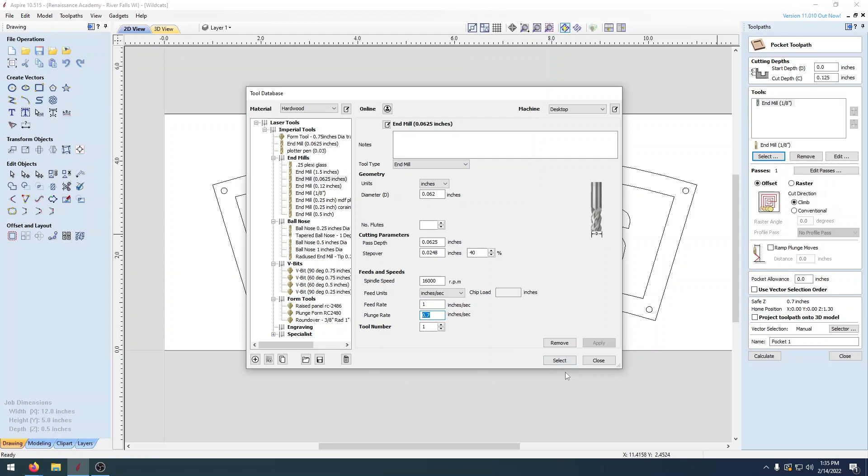So again, our pass depth we want to have is the same diameter as our mill bit. So our pass depth is 0.0625. Our step over is going to be 40%. So again, for 1/16 of an inch, it's going to be 0.0248. Our spindle speed is going to be 16,000 RPM. And our feed unit is going to be in inches per second. And our feed rate will be 1 inch per second and a plunge rate of 0.7 inches per second. And we will hit select.

Now what we want to do is select both of our vectors. So I'm going to select this outside one first, hold down shift on the keyboard, and select my text after that. Then I am going to select ramp our plunge moves, and we'll just do a distance of, let's say, 1 inch for our plunge move. What that's going to do is allow us to move horizontally as our bit goes down so that our bit has an easier cut. So then we'll hit calculate, and you will see a bunch of lines appear.

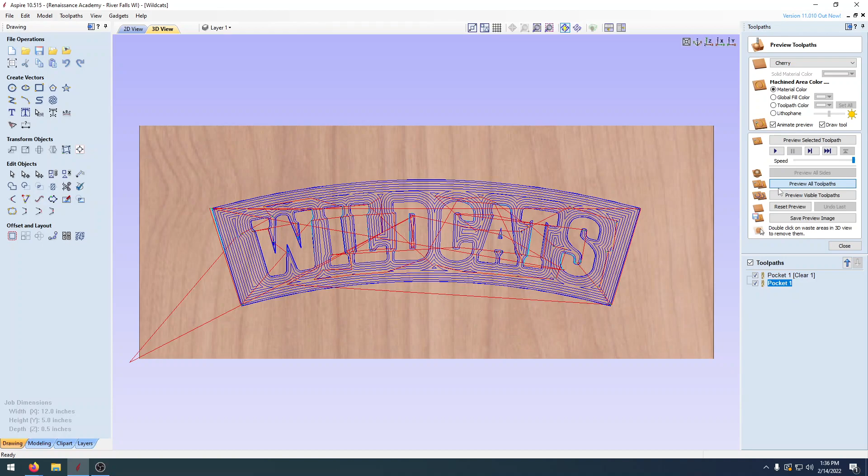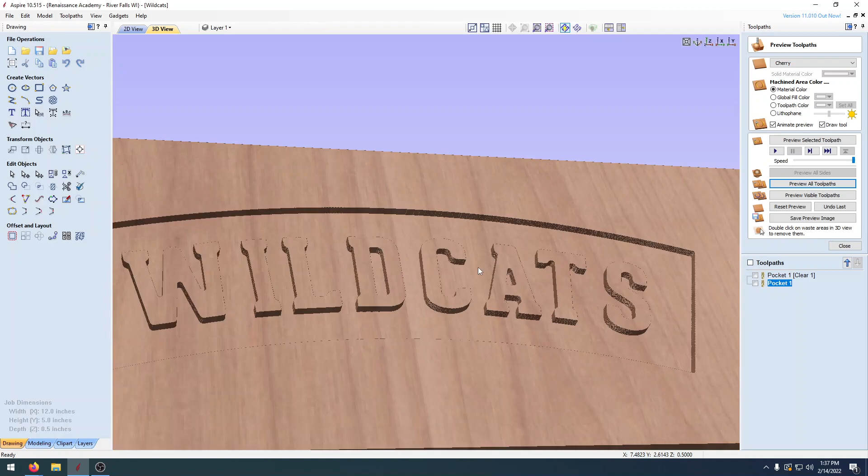If we'd like to preview this, we can click on Preview All Toolpaths, and the first toolpath that's going to happen is our 1/8 inch mill bit. And you can see that's doing a very good job of clearing, but it's not going to get inside the A or some of the other ones. So it comes back with a 1/16 inch mill bit, and we're able to clear everything out. And there we have it, the inside of that A came out a lot better.

So we'll hit close. And on the top here, I want to go back to my 2D view to get back to my drawing. The next toolpath that we're going to do is our drilling toolpath. So I'm going to click on my drilling toolpath, and our start depth here is going to be at 0 because that's going to be at the top of our surface.

And our cut depth for this is actually going to be 0.52. What this means is that our mill bit is going to drill 20 thousandths of an inch into our bed, so that we can be assured that our mill bit is going all the way through the material. We want to use peck drilling, and then I want to hold down Shift on the keyboard, and I want to click on all 4 of my circles.

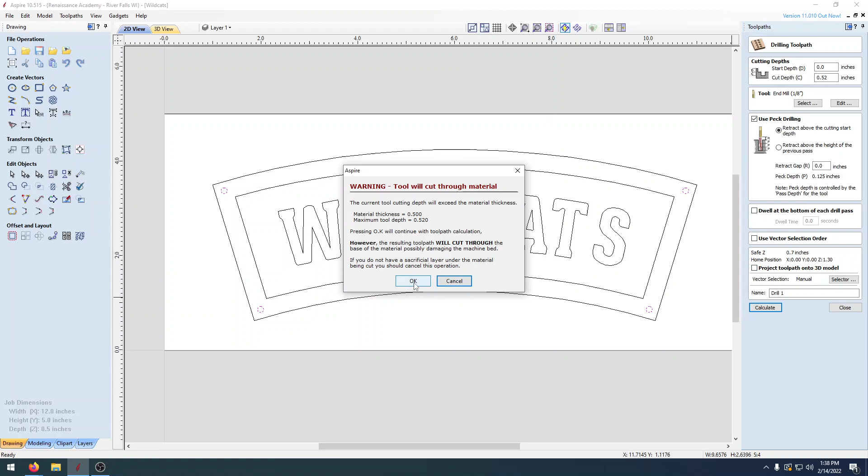We'll hit calculate. It may give us an error saying that the tool will cut through the material and it will go into the machine bed. We have a waste or a spoil board underneath this, so that will be okay. So we hit OK. And we can see that now the green tool paths right there show where those holes are going to go.

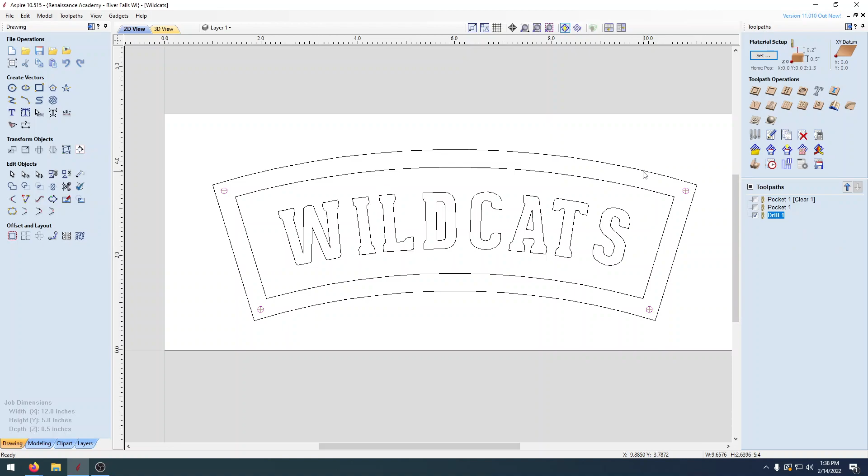I want to go back to our 2D view, and we have one more tool path that we want to do, and that's going to be cutting out this entire part. So we want to hit close here, and I want to select the outside vector. I'm going to come up to the profile tool path, and for this we're again going to start with a depth of 0, and for Corian we are going to use a cut depth of 0.48.

Now Corian is kind of a unique material in that it's a little bit brittle, and we aren't going to be cutting all the way through. What we are going to do is come 20 thousandths of an inch shy of the bottom, and that's going to leave a very fine layer underneath that we'll be able to break through, and it'll actually give us a better finish in the end when we sand that little lip down.

We're going to use our 1/8 inch mill bit, so I hit select, make sure that we have that 1/8 inch mill bit, and again just going through all of our different parameters. Our diameter is 1/8 of an inch or 0.125, pass depth again 0.125, step over of 0.05 or 40%, a spindle speed of 16,000 RPM. Our feed units is going to be in inches per second. Our feed rate will be 2 inches a second. Our plunge rate will be 1 inch per second. So then we hit select.

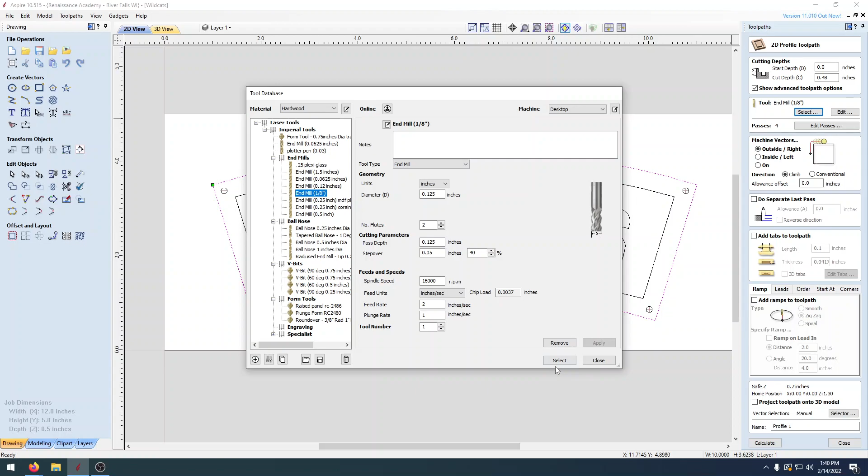This is going to be on the outside, and we want to do climb milling. What climb milling will do is it will go with the rotation of our mill bit, and then we want to do a separate last pass. What that's going to do is our final pass will be in the opposite direction, and it's going to come in 0.01 or 10 thousandths of an inch to clean up our edge so that everything is nice and even. Because when we cut using a CNC mill bit, you will get a little bit of deflection in our smaller mill bits.

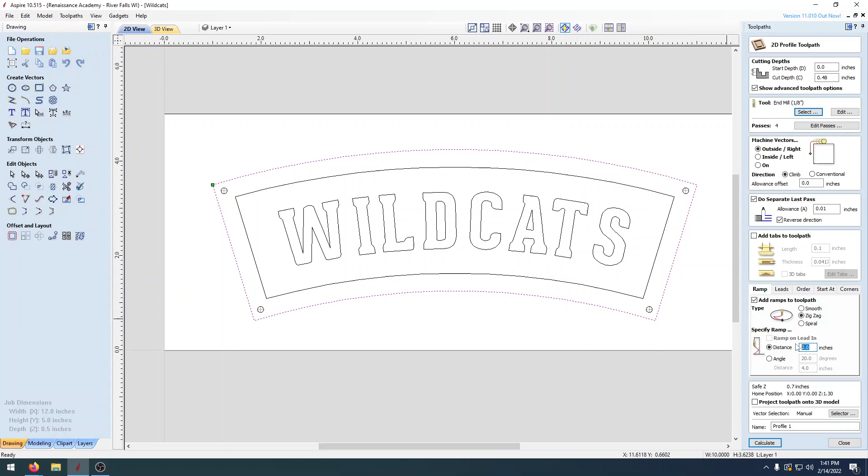So what we want to do is our final one: we want to make sure that everything is nice and even, and we take a final trim pass. So we have a 10 thousandths allowance there, and we're going to reverse the direction so that we are doing conventional milling on the way down. We're going to add a ramp to that tool path, and 1 inch should be good.

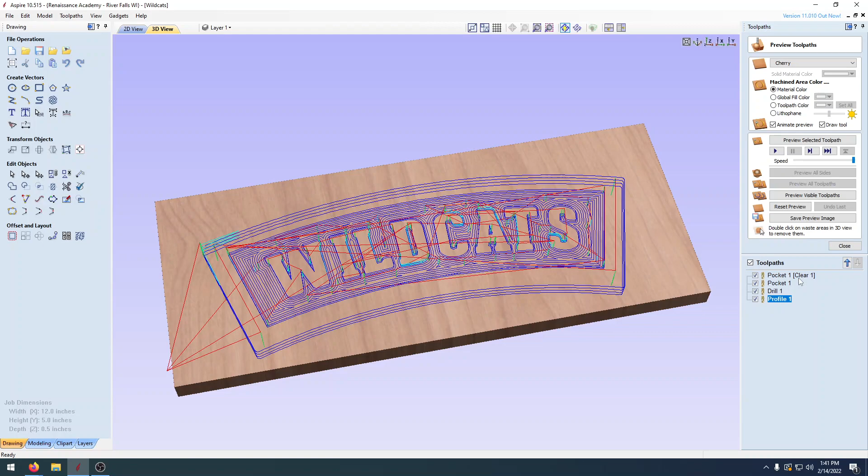We'll click calculate, and there we see our 4 tool paths. If we want to preview this, I'll reset our preview, make sure that all of these are selected, and click on preview all tool paths. We'll see it start out with our 1/8 inch mill bit. It'll go through, and now it has switched over to our 1/16 inch mill bit, switched back to the 1/8 inch mill bit, cut our 4 holes, and then we are cutting out the exterior of our sign.

Now, to make this a little bit more efficient in the shop: this one was made with our 1/8 inch mill bit, 1/16 inch mill bit, 1/8 inch, 1/8 inch. What we're going to do is take our 1/8 inch mill bit tool paths and have all 3 of these go first, and we're going to finish off with our 1/16 inch mill bit at the end. This one is taking a very light trim pass, so we will cut all of our 1/8 inch tool paths first, and then we'll switch out our tools to our 1/16 inch mill bit and finish up any fine detail on our part.

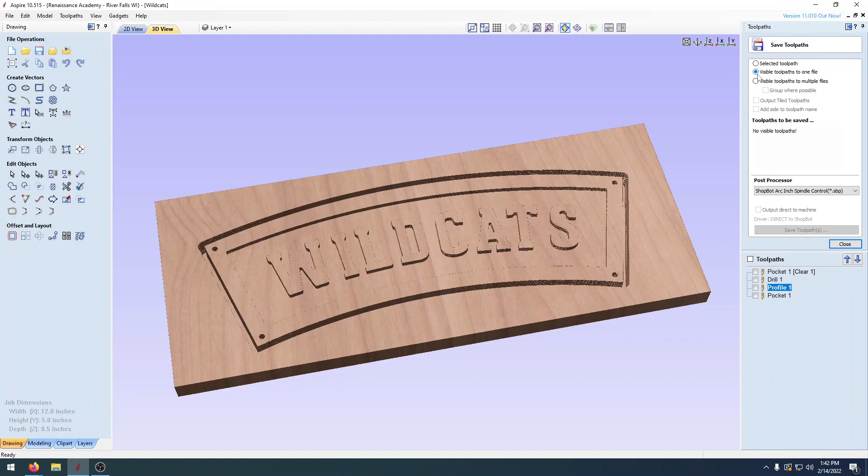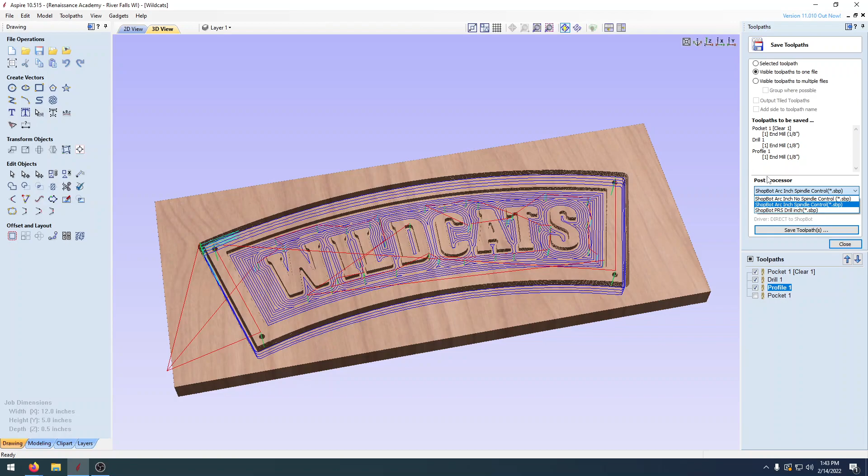When we are done with all of this, we want to save our toolpath. So we click on Save Toolpath, and we want to make sure that we have our visible toolpaths to one file. I'm going to select all of my 1/8 inch mill bit toolpaths, and if I select my 1/16, you're going to see that we have an error that the visible toolpaths use different tools. So I want to select my first 3, make sure that my ShopBot post processor is selected, and I'm going to save my toolpath.

Now, when we name this, we have a naming convention. We are going to do your last name. So I'll type in my last name, which is Brill. And then I want to type in which toolpath this is going to be. This is going to be my first of two toolpaths, so it's going to be Brill 1. And then I want to type in a description of the tool that I'm going to be using, so I'm going to do 1_8 mill bit.

The reason that we do this is when we bring this into the shop, we can't really see the tools or anything that's going to be used until we load up the file. So you can use a descriptive file name like this so that we are able to tell what tools need to be put in the router before we start it up, and we know which order our files need to be done. So I have Brill, that's my first toolpath, and there's the bit that I need to be using.

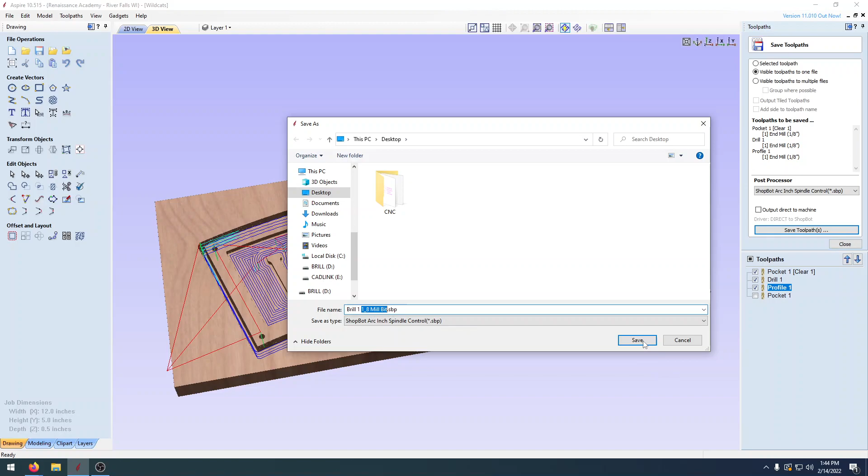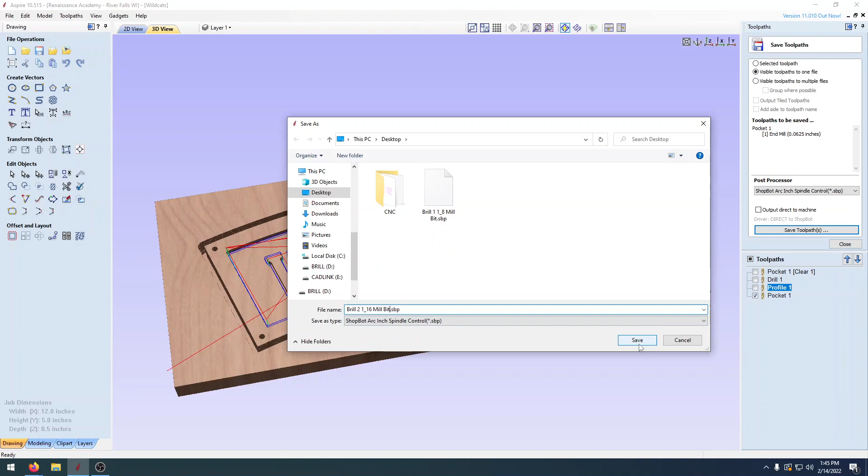We'll press save. Then we need to select the second one and save this toolpath, and it's going to be very much like the last one we just did. It's going to be my last name, except this is our second toolpath, so I'm going to type the number 2, and I'm going to do 1_16 mill bit, and then we select save. Now we need to bring those onto a flash drive, and then we will go and mill out our material. Make sure before you close anything down, though, you click File Save, and there we have it.